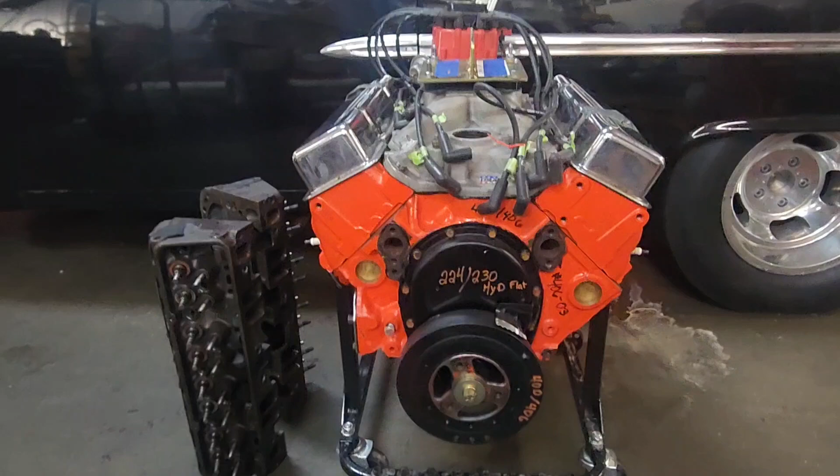This is a follow-up test. This motor was the 400 small block that I used in the 400 versus 396 video. But in that video, I ran this motor with 882 two-barrel heads, which produced 335 horsepower and 430 foot-pounds of torque. So the change that we've made is upgraded to double hump 186 casting GM heads.

They've got big valves in them. They were mildly ported, but let me show you some dyno footage of both combinations, and I'll come back and go over the complete specs of the motor with you one more time and show you the dyno sheets.

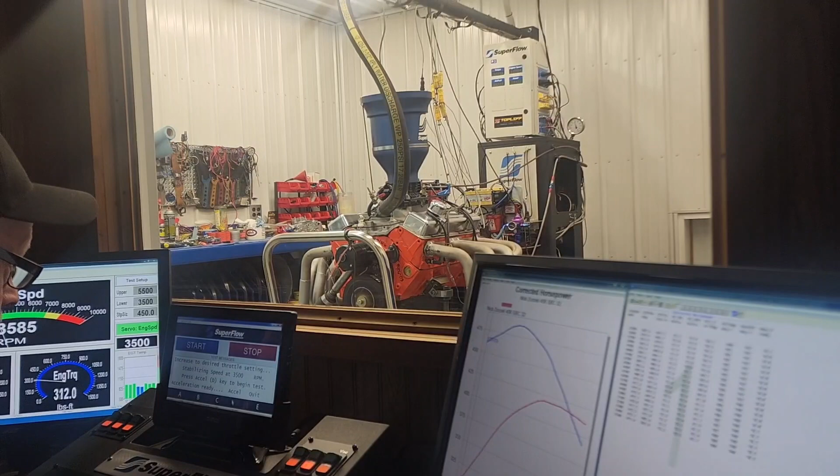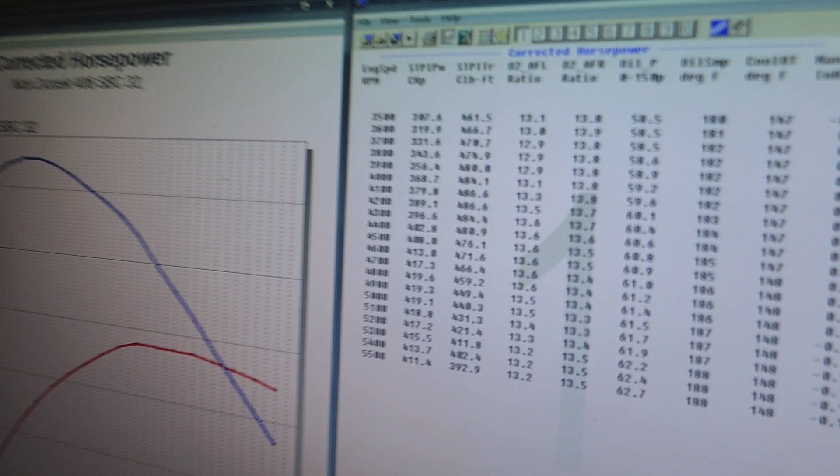Okay, I'm back to give you the complete specs on this motor. This is a 1971, the short block is a 1971 511 casting block. So that means it's a 4-bolt main. It has the stock oil pan that I believe came on at factory.

It does not have a windage tray. It's got the factory bolts in the mains. The mains on the crankshaft are turned 10 under. The rods are turned 10 under on the crankshaft. The rods in the motor are the 5.56 length stock connecting rods, upgraded with ARP rod bolts.

The pistons are 30 over, which the block is bored 30 over. They are 22cc dish cast pistons. The block has been decked, surfaced at one time. The pistons are sitting 30 thousandths below deck still, even after it has been decked. So that's the short block.

The cam that is in it is an Extreme Energy. The cam that we tested with is an Extreme Energy 268, 280 on the exhaust, advertised duration. Measured at 50 thousandths, it has a 224 duration on the intake and a 230 duration on the exhaust. The valve lift on the intake is 0.470, and the valve lift on the exhaust is 0.480. So that's the short block that we used.

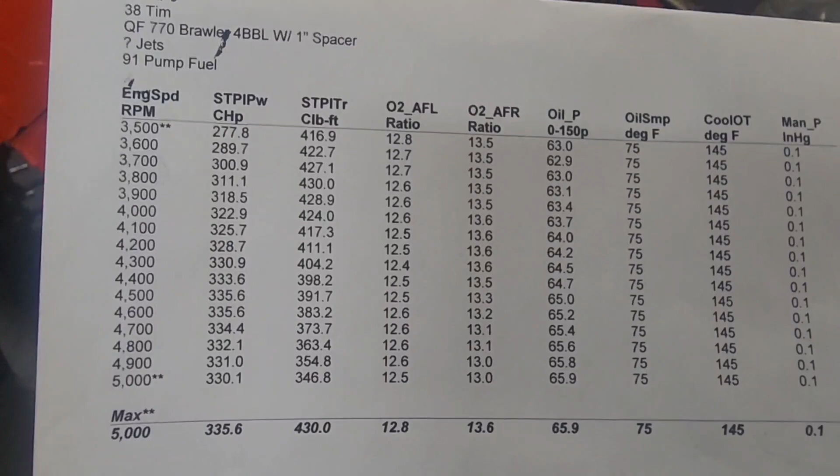Okay, in the previous test, we had an outcome with the 2-barrel heads of 335 horsepower and 430 foot-pounds of torque. So a change of only the cylinder heads to the 186s...

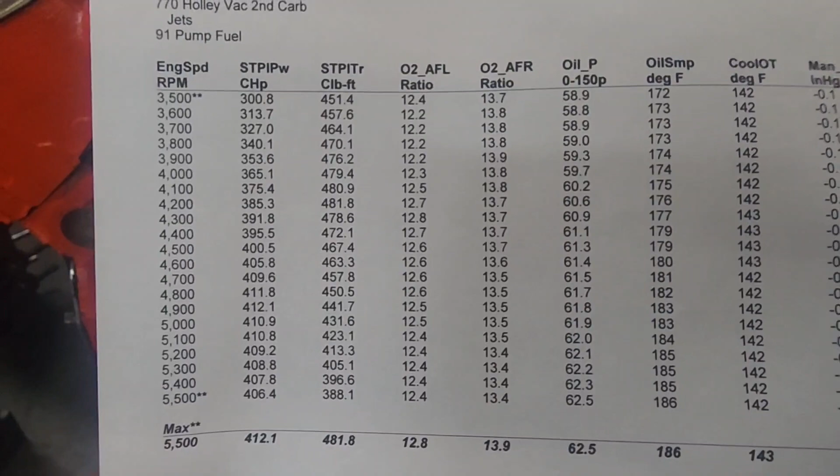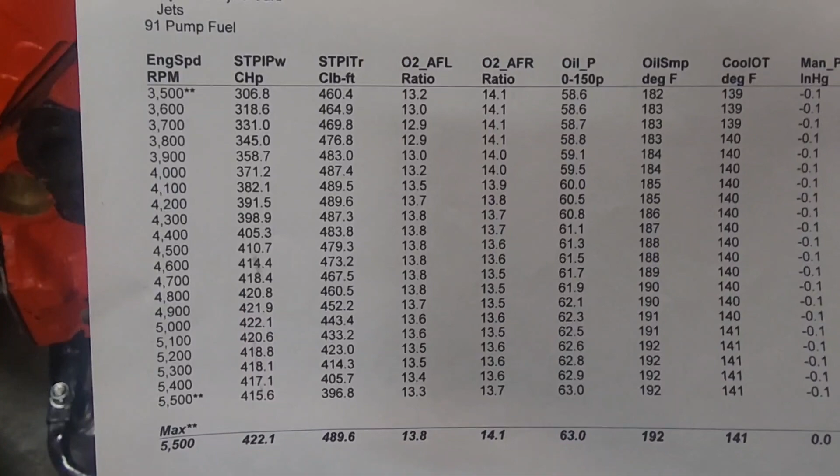This increased the compression ratio from 8.4 to 9.5. And the improvement of airflow gave us a horsepower of 412 and 481 foot-pounds of torque. That's with the 770 Brawler. We tried at the shop, dyno shop, a 950 carburetor, and it did 422 horsepower and 489 foot-pounds of torque. That's an 87 horsepower increase over the 2-barrel heads.

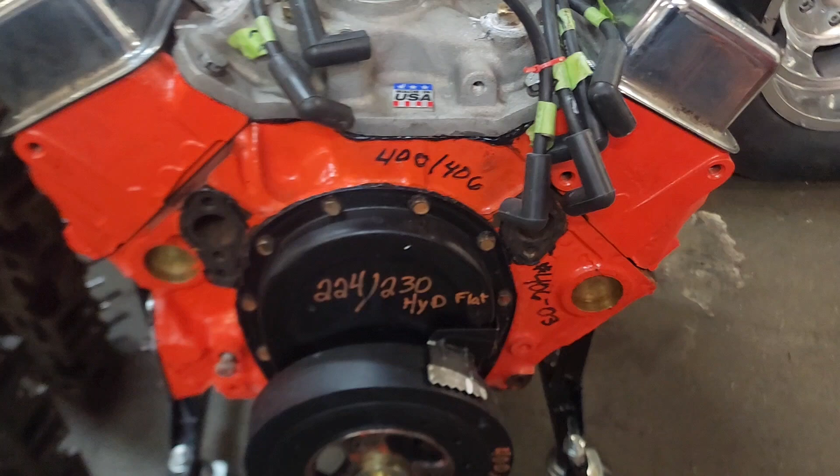So there was a huge difference between good quality heads that have great airflow characteristics and increased compression by a little over 1 point.